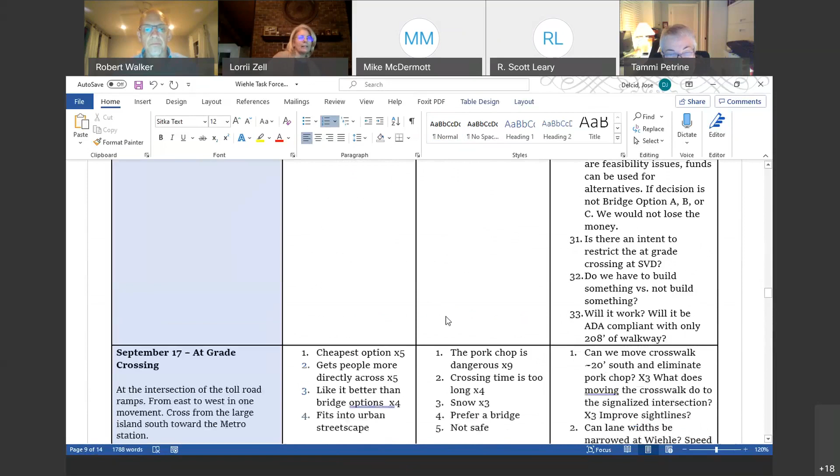I think that's all that I can think of. Jose is going to grab your questions. You can also put them in chat if that's easier. Then he can just grab them and cut and paste them into our continuing documentation of what we've been doing here. We've got documentation from every meeting that we've had. We have every question that you've asked, and we're going to try and answer them all so that by the end, hopefully after this next presentation, really we're going to do some solutioning and some soul searching.

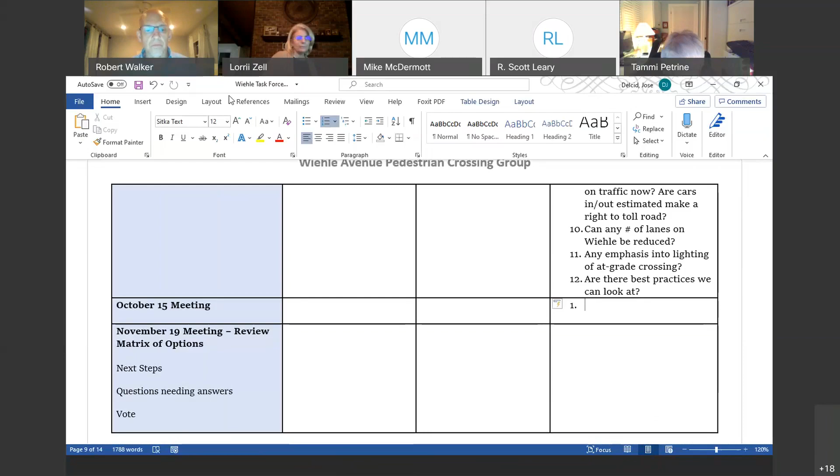And so actually the next meeting is going to be a little harder and more participatory than these have been, because you are going to be the one helping us, telling us why you feel a certain way. So we want to make sure we give you enough information tonight and answer a bunch of questions. So without further ado, I think we want to get started.

Okay, Bob, thank you, I have one more question for you. Sure, I have just one more question. Are you growing a beard?

This is my fall look. Your fall beard? Just checking. He's going rogue. It's almost no-shave November.

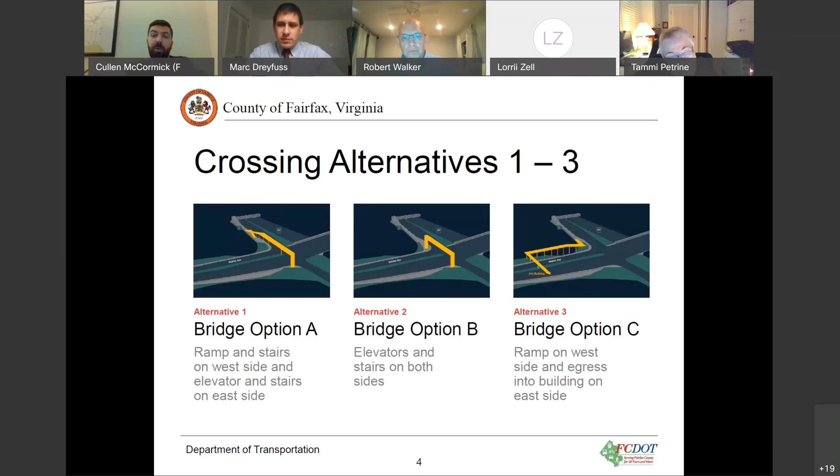As you may recall from last month, there are 3 bridges. One on the left has a long ramp on the west side of Wiehle Avenue, and then an elevator and stairs on the right side. Option B in the middle has elevators and stairs on both sides. Option C has a ramp on the west side and then connects into one of the buildings of the proposed campus commons site on the east side.

And then on the second page, we've got the tunnel alternative that will essentially punch through the 2 retaining walls just south of the toll road off ramps. And then 2 at-grade crossings: one at the intersection with high visibility crosswalks, and one at a mid-block with a HAWK signal.

We showed a picture of that last month. Essentially that's like a signal that only turns on when someone's trying to cross the street.

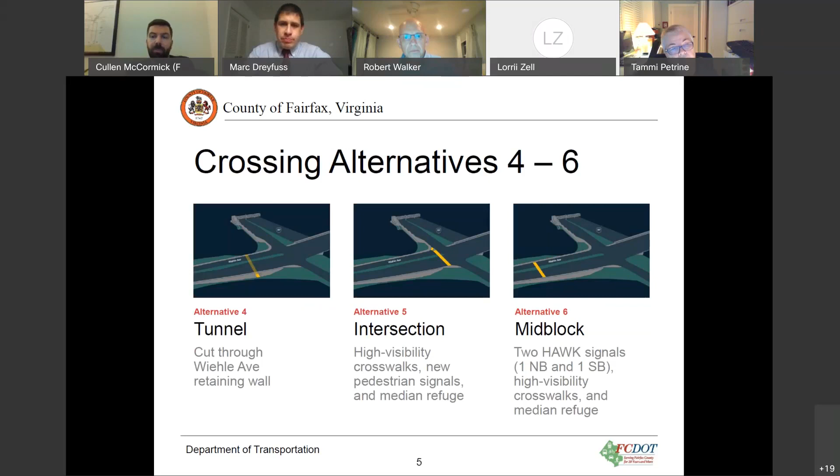So first up then is the walk shed comparison. Essentially this asks the question of how far can someone actually travel using sidewalks and walkways in the area. We picked 2 common units of time, 5 and 10 minutes, about the average length someone can walk in about a quarter mile or so. This is all assuming the shortest travel time, so not having to wait for things like signals and elevators, just how far could you possibly go in these times.

It's not sort of everywhere you can go. It's if you took a particular route, and then we did a software analysis that combines all those different routes together to create this area. We do this to see how much access the different crossing alternatives provide in the way of getting to key places around the Wiehle Avenue area.

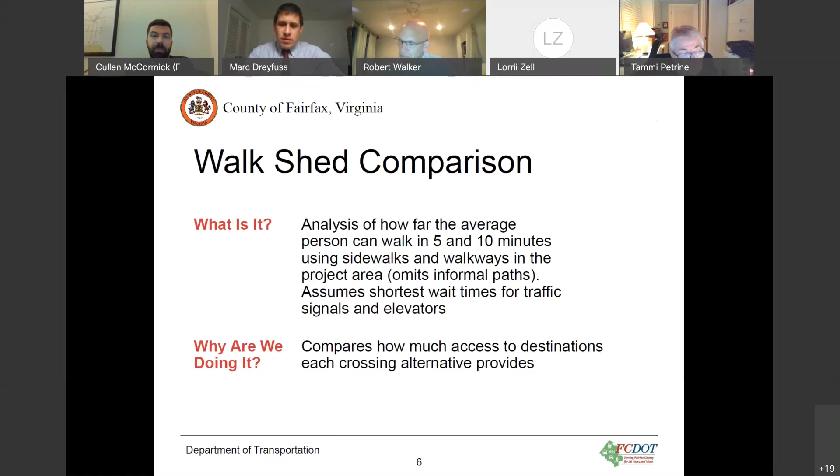So this is the overview of what you'll see on the following slides. There are red lines that originate from the center of the crossing that represent all the possible formal walking routes you could take. We're not really looking at cut-throughs or going through someone's backyard, just main routes here.

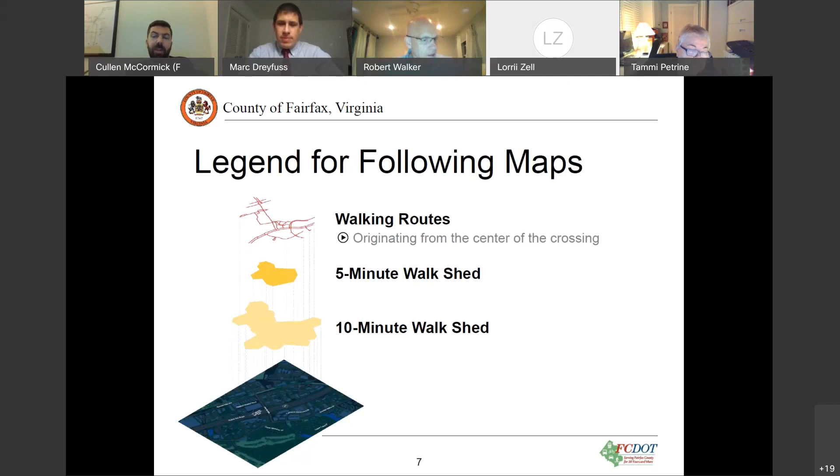Then in the darker shade of yellow, you'll see the 5-minute walk shed, which is everywhere one could possibly go in about 5 minutes. And then the lighter shade of yellow is the same thing, but at a 10-minute distance.

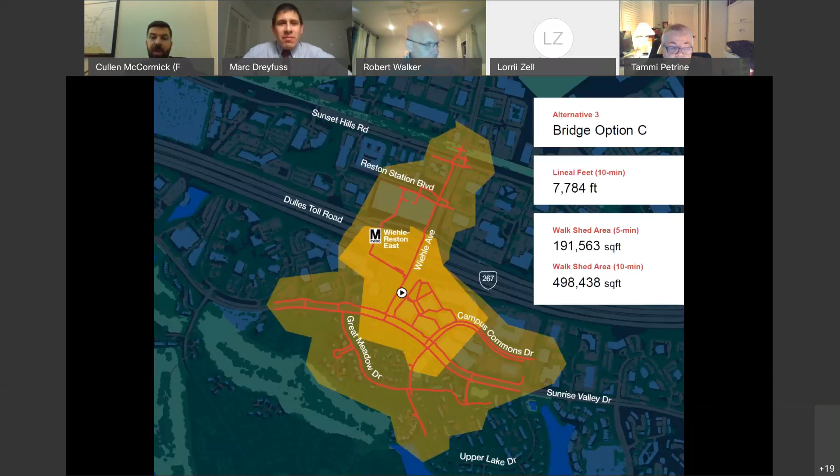Option C, which is further south and has some unique elements to it, has more coverage in the south of Sunrise Valley neighborhood area, but doesn't let you get quite as far to the north, given that it's generally positioned further south of the other 2 bridge crossings.

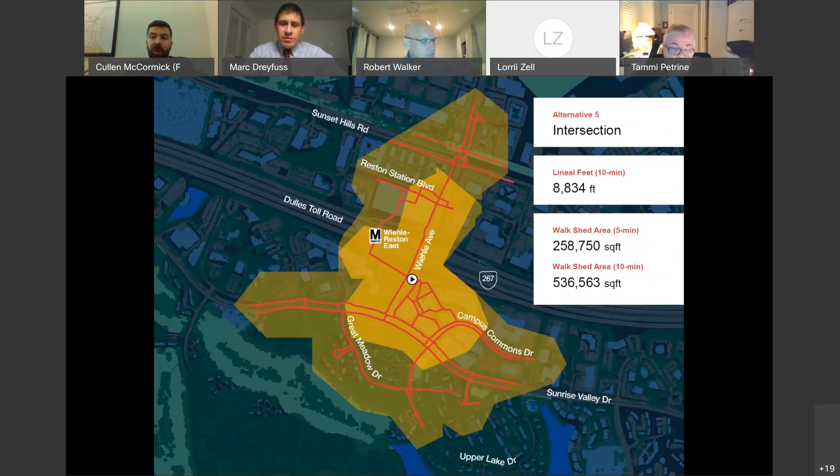So then we get to the tunnel, which has better coverage than the last bridge crossing, but as we'll see in a comparison a little bit later, is not the largest footprint. The largest ones actually go to the intersection at-grade crossings. This is generally due to basically not having to go out of your way to use these. There's no up and down, there's no tunnels, you just wait at the crosswalk and go. So the intersection crossing here is the largest footprint of all of the different crossing alternatives.

And then the mid-block one you see here last, because it's a little bit further south, it has a different profile here in terms of its coverage.

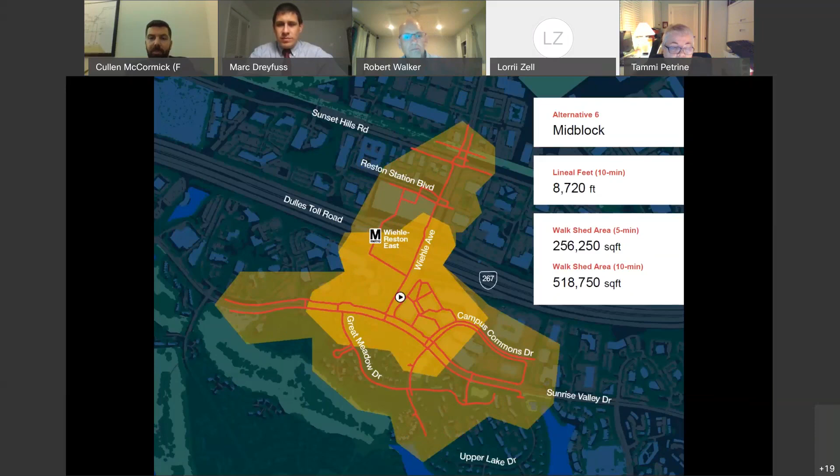These are all fun and good to look at, but it's probably easiest if we compare them all in a graph here. So what you'll see is the lineal feet, that's the distance you can cover—those are the red lines on the previous maps—the walk shed area of the 5 minutes, and then the walk shed area of the 10 minutes. If you can follow the contours of these graphs, you'll know that they generally go from largest to smallest.

There's this interesting wrinkle, though, which is the tunnel alternative. What we believe is happening here is that because it requires a lot of out-of-direction travel in the very immediate area of the tunnel, but if you're walking through the redeveloped Campus Commons site, you're kind of already at grade with the tunnel because it's already sunken down below the grade of Wiehle Avenue. You can actually go further to the south and east with that alternative. So it bumps up where you can go in a longer period of time, but you're constrained in the smaller amount of time simply because there's so much elevation change to get to distances in the immediate area.

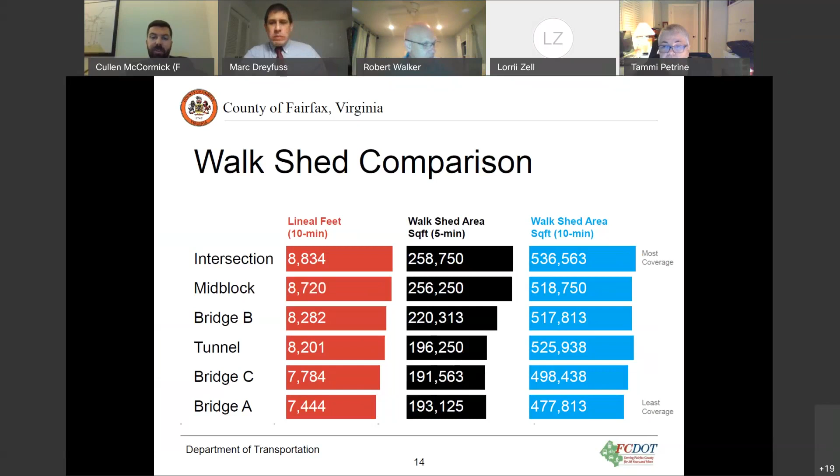So again, as you can see here, rolling this all up, the intersection crossing allows you to go the farthest in this amount of time. And then the Bridge A option has the shortest footprint or the shortest distance you can cover in the same amount of time. And so just some key takeaways from this analysis here.

Generally speaking, the crossings all provide similar coverage. You can get to major areas in the station area, commercial sites, office sites, large portions of the neighborhoods around Sunrise Valley. The at-grade crossings, as we mentioned earlier, tend to have the largest walkshed. Again, this is due to the lack of out-of-direction travel, no grade changes, and then, as we mentioned here, the intersection crossing has the overall best coverage.

Just kind of what is the scale of the magnitude of the difference between the best ranking crossing, the intersection, and then the one with the smallest footprint, Bridge A? It's about a 15% decrease in the lineal feet—again, the amount of path you can cover—and then a 25% decrease in the 5-minute walk shed between the two comparisons. So again, some differences here, but I think the key takeaway is they all provide generally similar coverage.

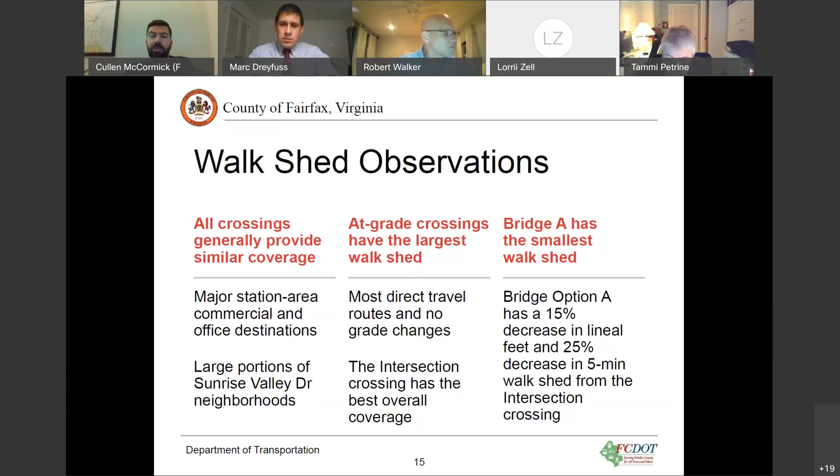So that kind of concludes the first portion of the analysis here. The second piece is related to the walk time comparison, which is kind of similar, but allows us to contrast the alternatives in a slightly different light.

Essentially what this does is we took 2 points in the area that represent a pretty typical trip that someone might make, beginning from the Wiehle-Reston East station south entrance. If you're familiar with the area, this would be basically at the escalators that lead you from the bus bays where the buses get off the freeway or the toll road and then head up into the station area. And from that point, the walking route here would continue south and to the east to the intersection of Sunrise Valley and Campus Commons Drive.

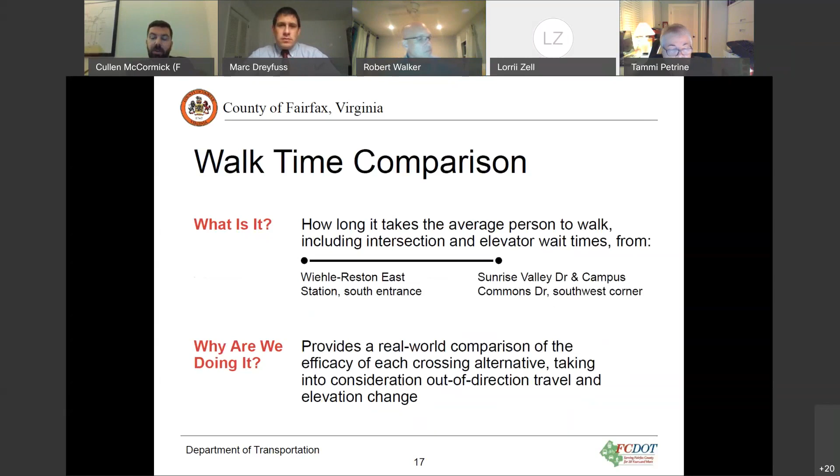Essentially what we did is we just calculated the walking time that a typical person would need to do this route following different alignments, different walking routes that take into accommodation the various different crossing alternatives. We're doing this again as a real world comparison of basically how efficient each of these crossing alternatives is for getting to and from common destinations in the area, taking into consideration things like out of direction travel or elevation change that are inherent to each of the crossing alternatives.

So this essentially will help you navigate the following graphics in the couple slides that are after this. You'll see these bar charts that show basically the range of walking time. The furthest you can get, assuming that you nail it and you get all of the lights green and you don't have to wait for elevators and things like that—that's that darker shade of color. The maximum walk time there is if you happen to get stuck at every intersection, just to give you the full gamut of possibilities here for your travel time.

And then what we've done with the colors is you'll see there are essentially 3 groupings of walking routes. There are those that follow the west sidewalk of Wiehle Avenue—you can think of that as the existing routes that are out there right now on the ground. Those that would follow a new sidewalk along the east side of Wiehle Avenue, in the black there. And then last, the routes that would follow a cut through of the campus commons site, taking advantage of some of the new walkways that the applicant will be building on that parcel.

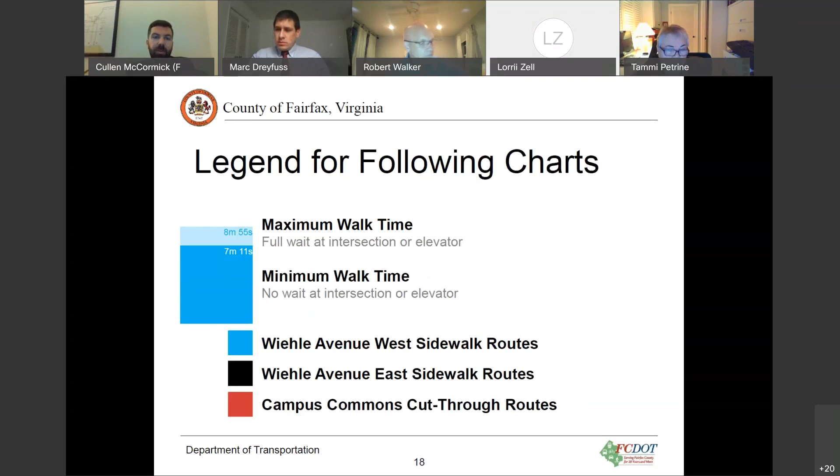So first up, we'll look at the Wiehle Avenue West sidewalk here. You can see the thumbnails of the routes at the bottom there. The one on the left basically takes you along the south side of Sunrise Valley Drive, up the west side of Wiehle Avenue, and then through the transit station plaza.

The next one assumes you take a more informal path through Commerce Metro Center. We looked at this because we saw a lot of evidence that people are already doing this path, and wanted to be able to include that in the comparison here. So generally you see walking times between about 6 minutes and close to 9 minutes.

When we look at routes on the east side of Wiehle Avenue, generally the travel times are a bit longer, and you can see why. If you look at some of the thumbnails at the bottom, you've got that corkscrew turn in bridge option C, where you actually have to go down a set of steps, enter one of the buildings on the development site, and go up an elevator to access the grade of the bridge. Some others, like the tunnel, involve going down a set of stairs, passing through the site, and then making more of a meandering route over the station.

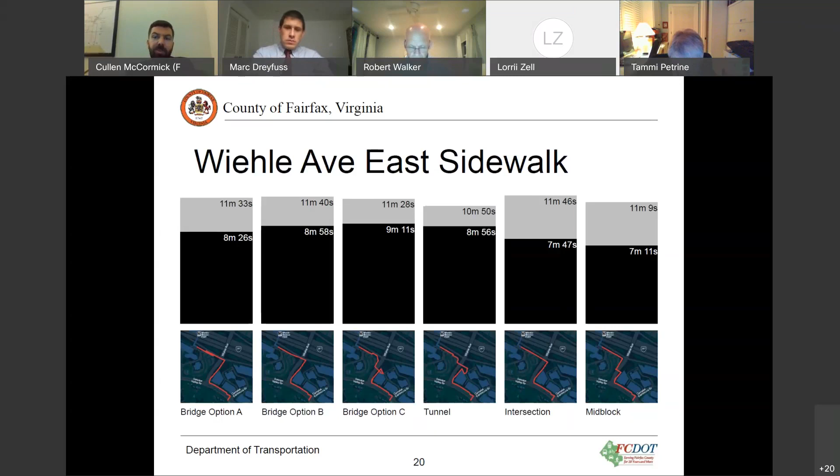Bridge option A, as you may recall from the thumbnail image earlier of the bridge profile, has a ramp on the west side that doubles back. So what you're finding here is that there's generally longer routes that require, in most cases, some form of elevation change. In some cases up to almost 12 minutes, which is a solid 3 minutes over the longest time you would have had on the Wiehle Avenue West sidewalk.

So then the last set of things we looked at was the Campus Commons cut through. Again, this is if you cross to the north side of Sunrise Valley from that intersection, pass through some of the paths on the site, and then continue along your journey across Wiehle Avenue.

And what you see here that's kind of interesting is there's some real winners and losers. Some of the routes can take advantage of the lack of grade change, like the tunnel, for example, which is below the grade of Wiehle Avenue and doesn't really require you to change grade. It's actually pretty efficient in terms of time.

But then you have some of these crossings that require you to go up to the grade of Wiehle Avenue from that lower area where the site is, like the mid-block crossing, or some of the bridges, which require you to not only go up from the lower level of the site to the grade of Wiehle Avenue, but then continue further up to go over the bridge. Those generally contribute to longer travel times.

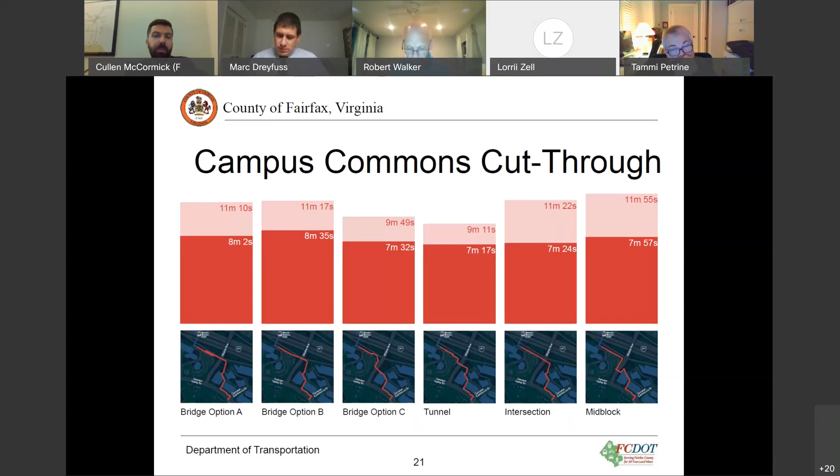So when we stack these all up again, like we did for the last set of data, you can see that really, if you're going to be making this journey, your fastest option is still probably going to be using the existing routes. Generally speaking, the cut-through routes do a little bit better in terms of saving you time than those routes that follow the east sidewalk.

However, the notable exception is the third shortest. Looking at the shortest travel times here, the third shortest is the Wiehle East sidewalk, which would give you a fairly comparable travel time to the west sidewalk, owing to how similar those routes are.

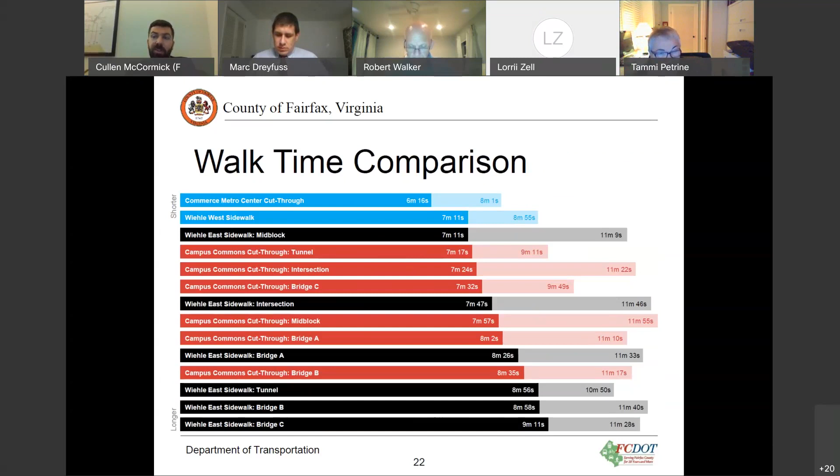So again, like we did with the last comparison, there's a couple of key takeaways. As I mentioned, existing routes along the west side of Wiehle Avenue appear to be still the fastest if you're doing this travel. The more traffic signals you have to go through, the more elevators you have to wait for, the more it increases your variability and creates less certainty in your trip.

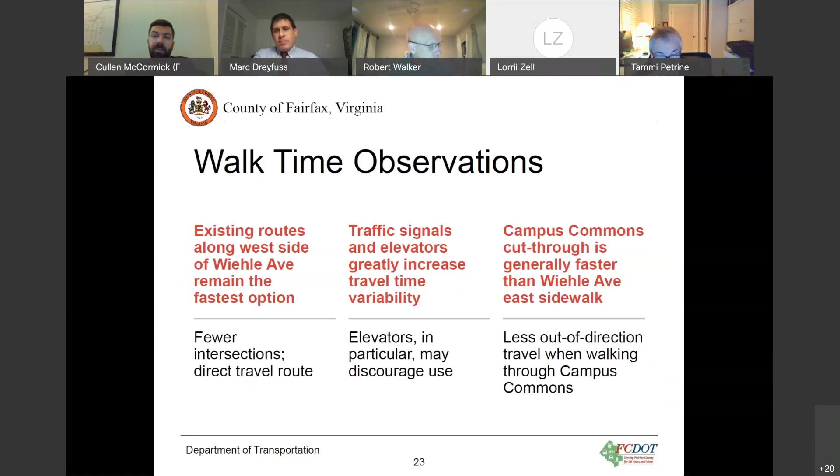And then last up, as we mentioned, the Campus Commons routes actually do provide a competitive advantage over the Wiehle Avenue East sidewalk, but again, that's still, in most cases, not enough to save you time over the existing routes.

So that gets us through the first comparison analysis here. At this point, I'll turn it over to Sagar at STV, who will walk us through some of the work they did to describe crossing refinements. And before he gets into it, he's going to describe some of the folks on his team who've been helping out with this work.

Thank you, Cullen. My name is Sagar Adivrekar, and I am a structural engineer with STV in our Virginia office. With me I also have our engineering director, Derek Overstreet. Before I go into detail about our crossing refinements and design feasibility, he will briefly speak about STV's experience with similar kind of work. Over to you, Derek.

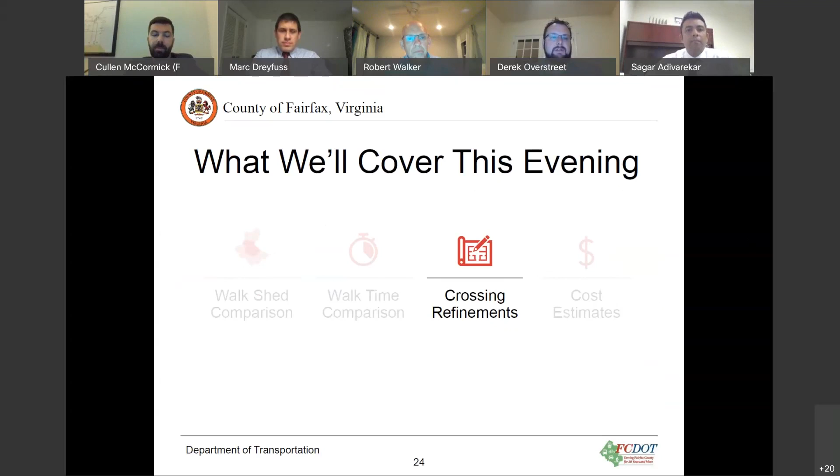Thank you, Sagar. I'm Derek Overstreet, and I manage our bridge and structures practice for STV in Virginia and Washington, D.C. As we looked at this project with Fehr and Peers, we applied a lot of our past experience in pedestrian bridge and pedestrian tunnel work. In the last 15 years with STV, I've been involved in a number of pedestrian bridge and tunnel projects. Right now we're involved in the design of six different pedestrian bridges for the Virginia Railway Express in Northern Virginia. I've also been involved in a VDOT project with a shared use path bridge over an interstate near Roanoke, Virginia, and other pedestrian bridges in North Carolina.

As far as tunnel experience, I've got both design and construction experience. On the construction side, I've been involved in a number of micro-tunnels and hand-mined tunnels. On the design side, I've designed a pedestrian tunnel in Spotsylvania County, and we're looking at a few concepts for VRE at some of their stations. I also designed a vehicular and pedestrian tunnel underpass in Hanover. So we've got a lot of experience, and we've applied lessons learned and past knowledge in looking at this crossing project, which we've been very excited about. I'll turn things back over to Sagar.

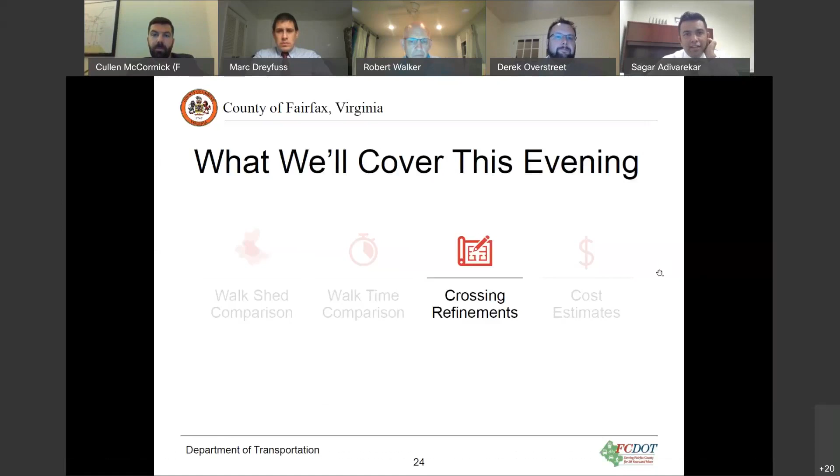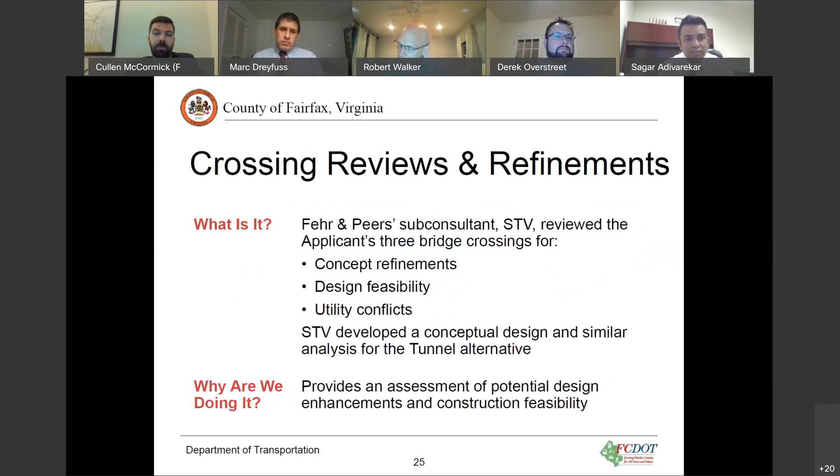Thank you, Derek. Can we go to slide 25? As Cullen mentioned, we at STV reviewed the applicant's three bridge crossing options, A, B, and C, for concept refinements, design feasibility, and also utility conflicts. STV also developed a tunnel option, and we looked at the same things for it: design feasibility and any utility conflicts. At the end, we also developed a rough order of magnitude cost for each of these alternatives.

Next slide. So these are the alternatives that we studied. The intersection and the midblock options don't have any structural elements to them, like a bridge or a tunnel, so we did not study those. But these are the three bridge alternatives from the applicant that we studied, and we also assessed a tunnel option.

As Cullen has talked about these thumbnails before, bridge option A has a ramp that is very close to the Metro station exit, and then an elevator on the east. Bridge option B has an elevator on both sides. Bridge option C has a ramp on the west that goes along Wiehle Avenue, crosses the bridge, and is connected to one of the buildings on the east side.

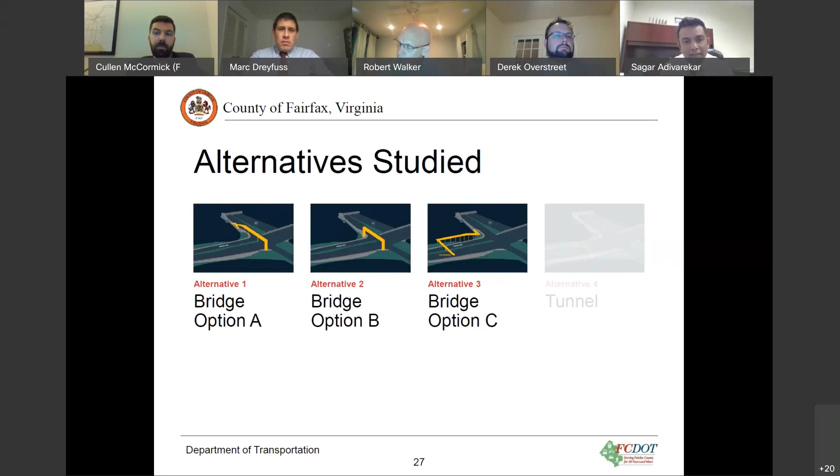In terms of concept refinements, we looked at the applicant's bridge, which provided a minimum vertical clearance of 17 feet. We recommend providing 17 feet 6 inches of vertical clearance. Normally for highway bridges, vertical clearance is 16 feet 6 inches, and the AASHTO LRFD guide specification for pedestrian bridges requires 1 foot higher than highway bridges. So we recommend 17 feet 6 inches as vertical clearance.

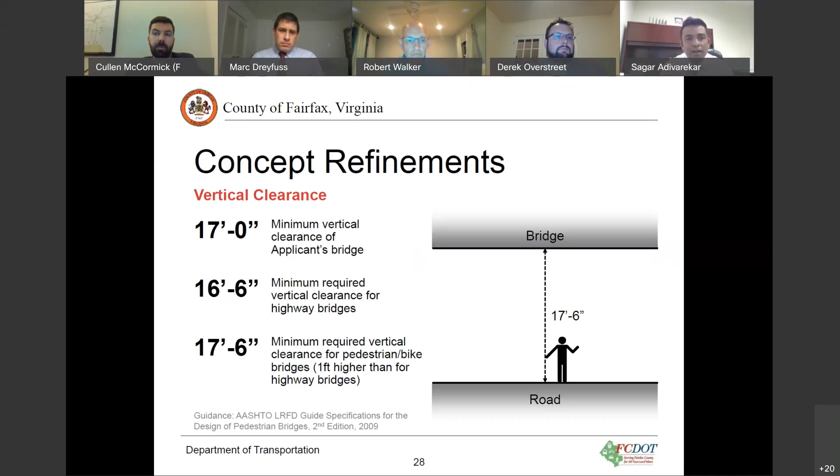Next slide, please. The applicant's bridge had a face-to-face width of 6 feet. To accommodate bicycles and pedestrians on that bridge, we recommend a 14-foot wide bridge with a clear width: 10 feet for the pathway, and 2-foot buffers on each side.

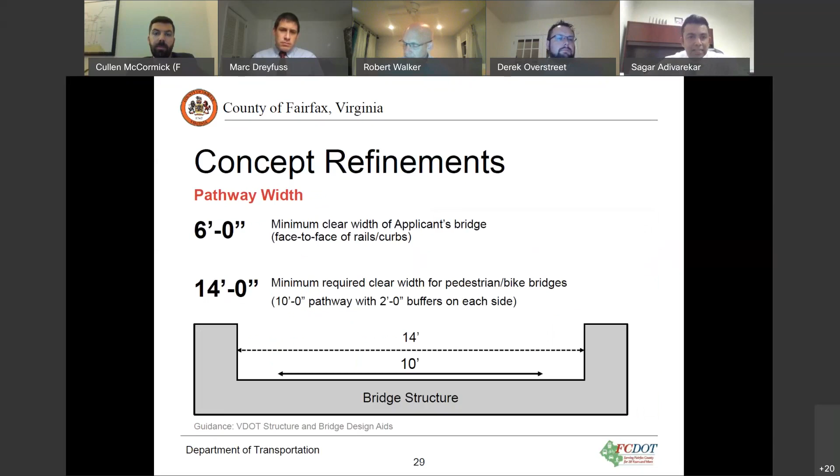We also recommend some pedestrian lighting for nighttime use. The applicant's concept did not include any details on the lighting, so that is one thing which would add to a bridge.

When we looked at these three bridge options, A, B, C, there are bridge piers right in the median, as well as piers for the ramps that get on the bridge. There were no pier protection systems in place on the plans. If there is a bridge pier, you need to ensure it is protected from any vehicular collision. That system is essentially a ground-mounted crash-worthy barrier with a guardrail attached, and the guardrail also has an impact attenuator attached. So we recommend having some form of this kind of pier protection system to protect the bridge piers.

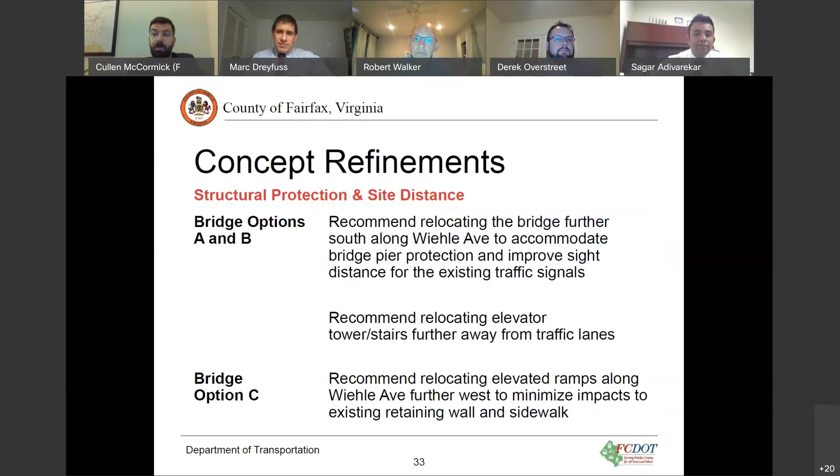That was the concept refinements for the three bridge options. Now I'll talk a bit more about the design feasibility of these options. First, these bridges need to comply with the requirements of the AASHTO LRFD guide specification for design of pedestrian bridges, as well as some parts of the AASHTO LRFD bridge design specification.

For the bridge's inspection frequency, it really depends on the type of structure. I've noted that a fracture critical bridge, for example a truss or a steel two-girder system with a fracture critical member, would need to be inspected twice as often as structures without them. So we would consider precluding use of these kinds of fracture critical members. I bring this up because the applicant's bridge is 6 feet wide, so it would potentially have two girders, and we'd want to avoid that based on past experience. I was working on a bridge at the Appalachian Trail in Roanoke, and VDOT had specifically told us to preclude use of a two-girder system bridge there.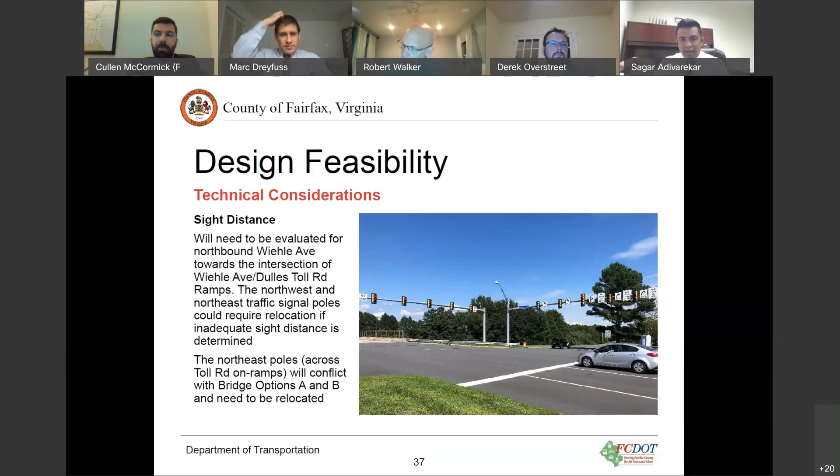Along with that, there's the northeast pole that has a long arm extending across the toll road access road. That would be in conflict whenever there's going to be either the bridge in option A and B, or the elevator tower as well. So they would need to be relocated.

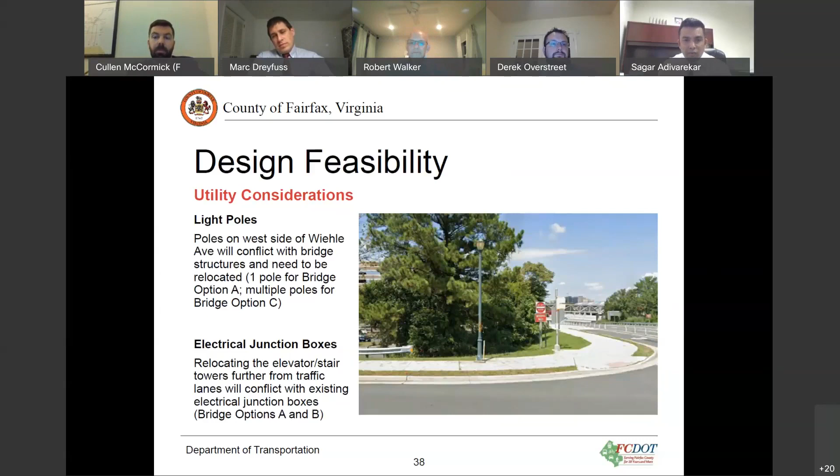The other utility considerations we looked at for these three bridge options: as you can see in the picture, there's one of the light poles, but there are several other light poles as you go south on Wiehle Avenue, to the west, that would need to be relocated during construction of the bridge and the bridge ramps. Along with that, there would be some electrical junction boxes on the east of Wiehle Avenue, right at that intersection. So as soon as we try to relocate these elevators or stair towers further away from the traffic, those might conflict with the junction boxes for option A and B.

Next slide. So that was what we developed for the crossing refinements, as well as the design feasibility and utility considerations for the three applicants' bridge options.

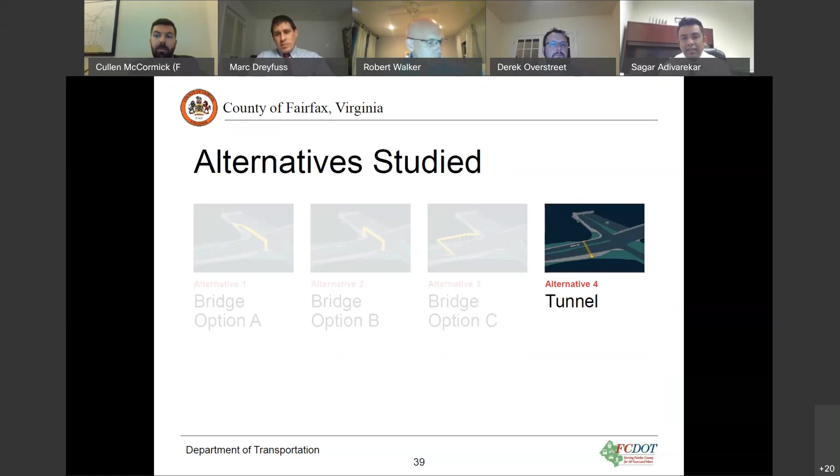And this is the tunnel option that STV developed, under Wiehle Avenue, going east to west. This is a sketch; at the top you can see a longitudinal section. It's essentially going east and west under Wiehle Avenue for a length of 155 feet. This was the shortest length across Wiehle Avenue.

As you can see, this is going to be a 14-foot clear width, similar to the width of the pedestrian bridge that we mentioned or recommended in the refinements. It will have an 8-foot minimum vertical distance inside the tunnel. And as you can see in this picture, it's going through two retaining walls: on the east, an MSE wall, and on the west, a cantilever concrete retaining wall.

We might come back to this slide as we talk about the other, but let's move ahead to slide 40, please.

These were some precedent examples. We wanted to show you these from Georgia and Pennsylvania, similar kinds of structures constructed under a live railroad track. We have a live road, so something similar. These are also subgrade; it would probably need a ramp or a stair going up. It would look something like this, as fancy as you can make it, with a brick facade, or you could just have a regular concrete finishing inside. But these are just examples to give an idea of how the tunnel would look.

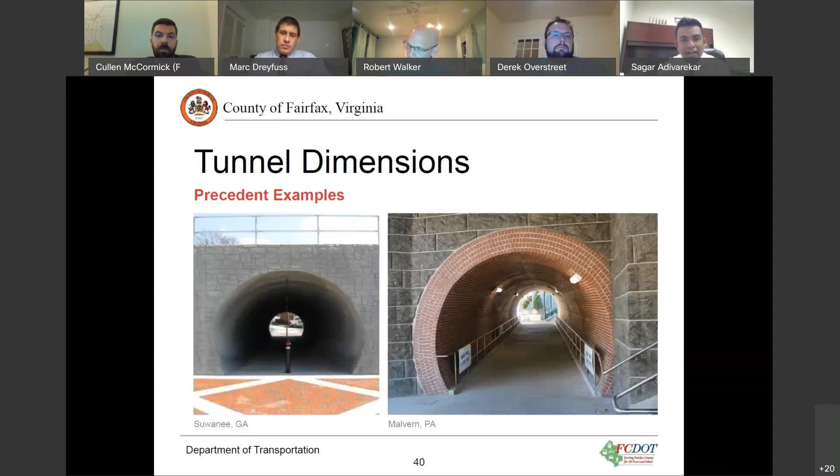We can go on to slide 44. So with the tunnel options, there are also utility conflicts. We definitely identified two 15-inch reinforced concrete pipes under Wiehle Avenue that would have to be relocated when the tunnel is put in. There's a drainage inlet and associated pipes right in the median where the tunnel would pass, so those either need to be abandoned or relocated.

And there are several light poles on the retaining wall on the east, which would be in conflict during placement of the tunnel. So essentially, they can be taken out during construction and put back on top of the retaining wall once it is put back after the east portal is completed.

Next slide. And this is where we were done with our assessments, and now we get into the cost estimate. These are really high-level, rough order of magnitude costs that we developed for these options for design, construction, and also construction inspection. It compares the amount of investment required for each.

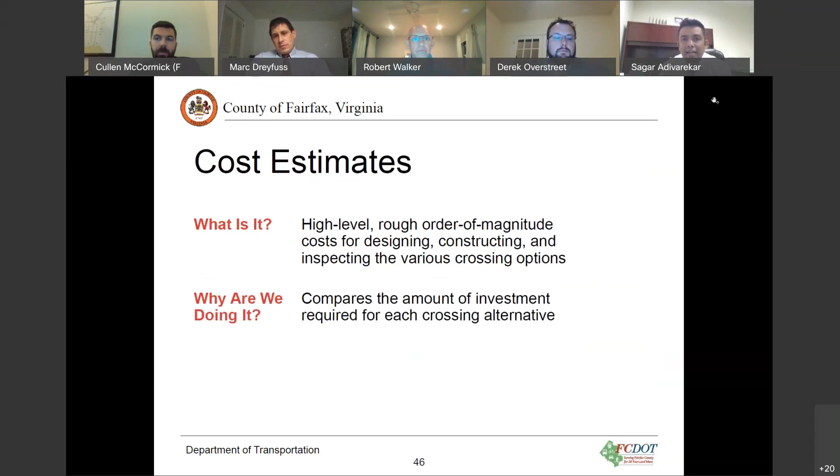I'm going to let Cullen take over for the next slide. Great, thank you, Sagar. Basically Fehr & Peers and STV split up the cost estimates. We do a lot of work related to traffic engineering, so we handled the cost estimates for the at-grade crossings, which I'll talk through here in just a second, and then Sagar will explain the cost estimates that were developed for the various bridge crossings and for the tunnel as well.

In the mid-block, the lion's share of that construction cost comes from getting a new traffic signal.

Those tend to be fairly pricey, adding it to that mid-block section. Because this crossing would require additional modification to the median, adding in new pavement markings, new curb ramps, it's got a higher planning and design cost versus an intersection which is by and large already using existing infrastructure. I'll pass it back to Sagar to talk through the cost estimates for the bridges and tunnels.

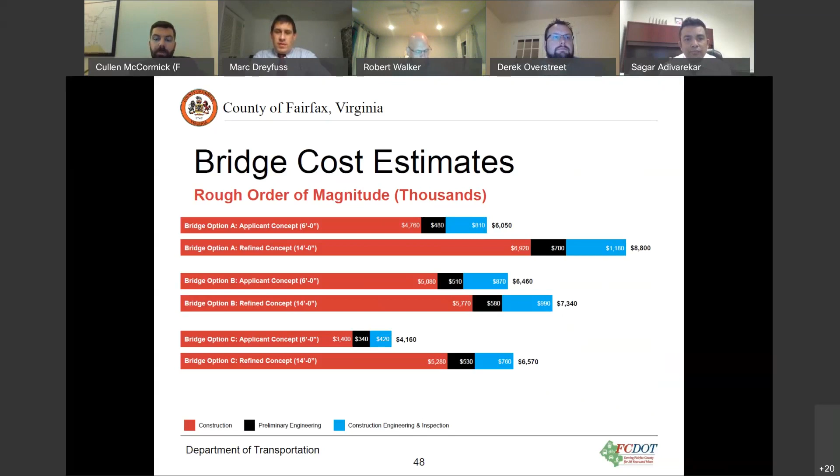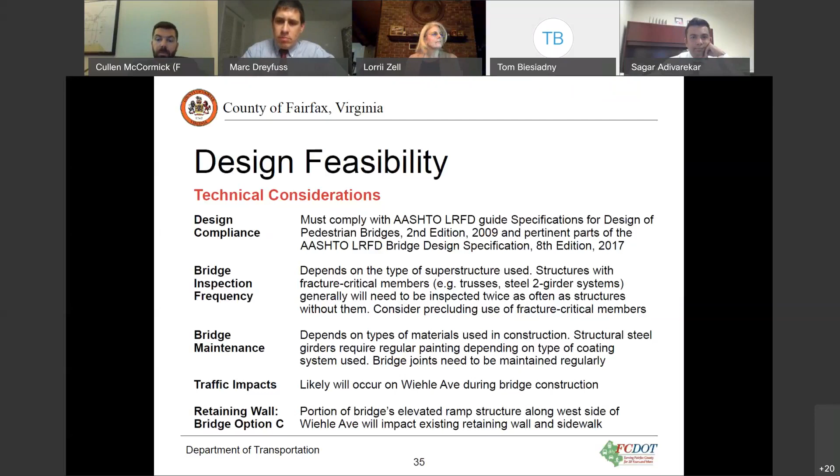Okay, thank you, Tom. I have one last question on page 36. This was interesting, Sagar, I didn't quite understand this. Does this mean these bridges cannot even be built because you cannot put the crash protection in, as they're modeled too close — there's not enough room to put these crash protections in? Or are crash protections optional?

I think Sagar can take that one as well. So the crash protection — you would have to design it for a crash collision. Feel free to chime in, Derek, if you have something to add. They can be designed for collision, however, in most of these cases, the sizes of the piers and everything would start getting bigger, the reinforcements start getting — it's like a spiraling effect the design would have as soon as you start bulking it up to take the impact. Most of the time what I've seen is providing a pier protection barrier in front of these piers, like at least on the highway, or where there's traffic with high speed. Derek, do you have something to add to that?

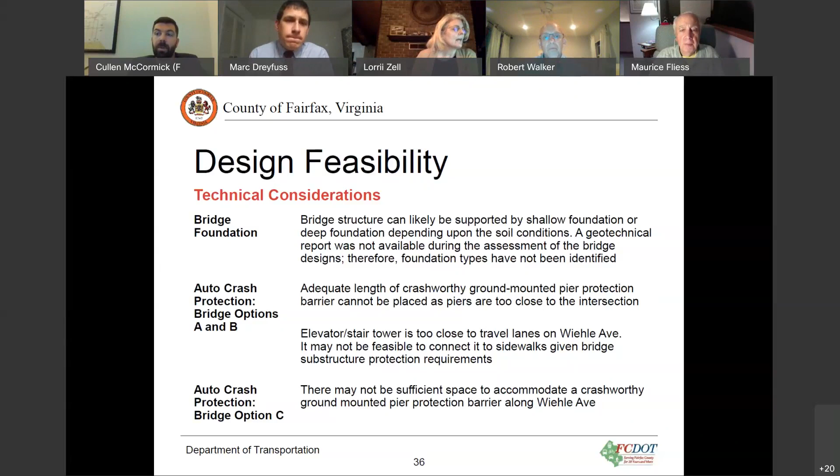All right, so I'll start with the first part of your question, and then I'll turn it over to STV, who might be able to speak in general terms to the second part. Before you start, can the slide on cost be brought up, page 50, please? And then Marc, go ahead. Okay, wait till we get that up.

So to answer the first part, yes, a cut and cover option, which for those who don't know would mean essentially digging out a hole and then covering it up—based on this situation and the importance of Wiehle Avenue, both for access to the Dulles Toll Road and access over it, we considered it and felt the impacts to traffic would be too great. It wouldn't just impact traffic on Wiehle Avenue, it would impact traffic patterns on the Dulles Toll Road and how people could get to and from their homes. We would have to close either all of Wiehle Avenue or half of it at a time for an extended period, and given the critical importance of that corridor, that didn't seem feasible.

The other piece of that equation, though, was something you mentioned in your first question—based on the grade differential, because we wouldn't have to dig down as far to bore, that actually had a positive impact on the overall cost. But I'll turn it over to STV to speak a little more to the relative costs between cut and cover and the option they estimated here.

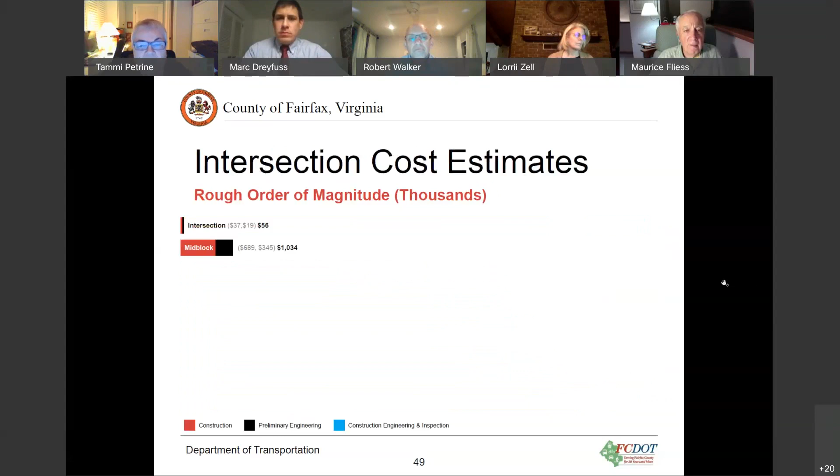One last technical question on the underpass. It was mentioned that on the west side, the elevation is not the same as grade. Is it lower or higher? Does it need a ramp up or a ramp down? And could the tunnel itself be sloped to accommodate for that grade change?

Thank you. Hi, Tammi, this is Marc. I'll actually say on the first point about the destinations, you can hang that one on me. The reason we used the Metro to the Sunrise Valley Campus Commons intersection wasn't so much to say that everybody's going between those two places. It was mostly to pick two destinations that weren't immediately at the intersection.

Obviously, there could be additional analysis, but effectively we're looking at where the bulk of the pedestrian traffic would come from, and based on Theron Pierce's analysis of the times, if you were on the bridge on the Wiehle Avenue Bridge, it's going to be faster to walk down Sunrise Valley Drive than to cut through the neighborhood. So if you're on the west side, coming from the new building at Reston Station at the corner of Wiehle Avenue and walking south, you're better off staying on the west side of the street.

That said, we also looked at the likely destination of a lot of people that might be using a crossing in this location, and between the Campus Commons development, the other office park to the east of Campus Commons, along Campus Commons Drive, it seemed there would be a lot of demand, not all, but a lot of the demand would be going from the area between Sunrise Valley Drive and the toll road across Wiehle Avenue to the metro station area. So we thought that was a good example.

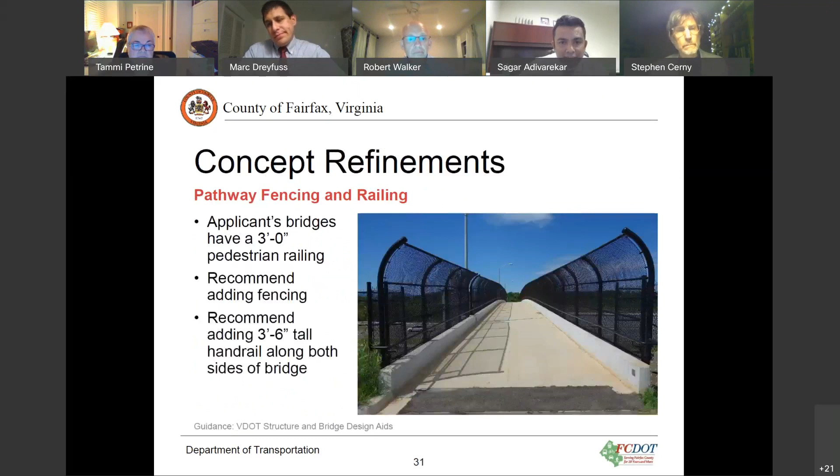Sagar or Derek, can you speak? So you are talking about relocating the bridge further south on Wiehle Avenue and how far it should be from the intersection. So the picture I had up for the pier protection, I don't remember the slide number, but as you can see, from the edge of the pier protection it goes a certain length, and that depends on the speed and all that. It's either 30 feet or 35 feet on each side of that pier face, and then of course there is a guardrail connection to it too. So I think it would have to shift at least that many feet at a minimum to be able to place that pier protection, and then also an impact attenuator in front of it to make sure it's adequately protected.

Okay, thanks. And then my second question is, so the tunnel estimate does not include utility relocation? Correct. Do you have any sense of how much that could add to the cost? Would it be in the millions, I would assume? I don't exactly have a number, how much in a ballpark it would cost. With the limited information we had, we really don't know how deep those utilities are. I also don't know how long they run along Wiehle Avenue, and at what could be a good point to actually relocate them, and if they have to go through a different alignment, where it would be. So I do not have a ballpark or any number for that utility relocation. Okay, thank you. Thanks. Thanks, Stephen.

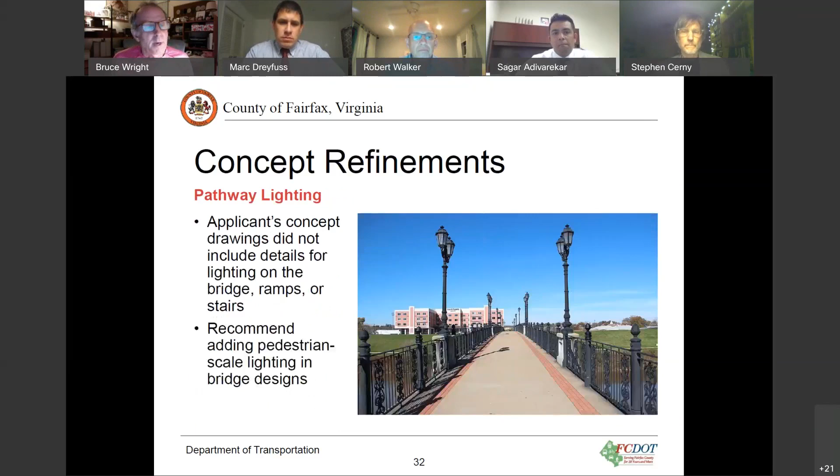Steve got to one of the questions I had about utility relocation, and I'd think that would be pretty costly. It seems hard to move forward with the decision without at least a ballpark estimate. I also have a comment about slide 34, where there's a recommendation for a metal bollard on the bridge. As a cyclist, those can be very dangerous, and we've advocated not to have those on bridges. I know the Park Authority will sometimes put them up despite our protests, but that's not something we'd like to see. I don't think there'll be a huge problem with motorists using these bridges, but anyway, that's a minor point.

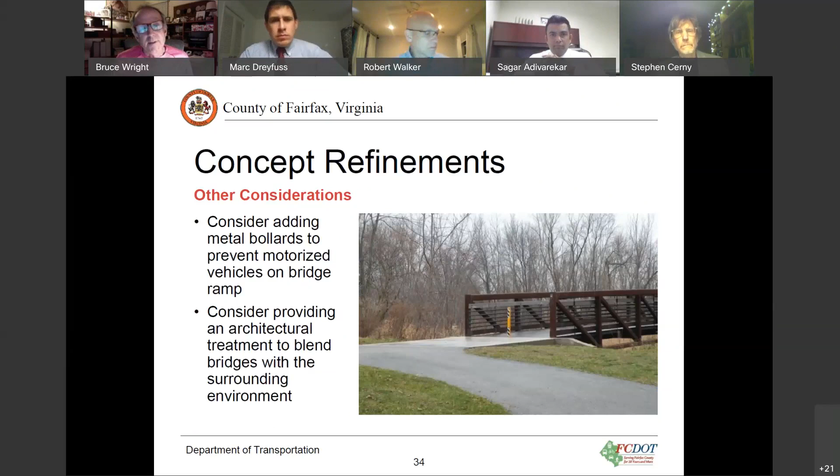Back to the cost - is it correct to assume the county will be responsible for the costs above? No? Okay. If the applicant builds the bridge, the applicant pays the full cost, is that correct? That would be correct - if the applicant builds a bridge as per the proffers, they would be responsible for all costs involved. All right, what about if there's a tunnel?

Is the applicant obligated to build that, or do they only contribute $1.5 million, as Tammi had said? If the study group selects any option that they recommend to the board, and the board moves forward with any option that is not bridge option A, bridge option B, or bridge option C, the applicant will provide a contribution of $1.65 million, and the county can do whatever it feels is appropriate with that to improve a crossing at this location.

Okay, and this is actually a good opportunity to remind everybody that the way the proffers are worded is that the applicant will provide one of the three bridge options, or $1.65 million for the county to improve the crossing - which could be a different overpass, underpass, improvements to at-grade, whatever makes the most sense. I also want to note, in regard to the utility question, a utility survey would be needed to reach that level of information.

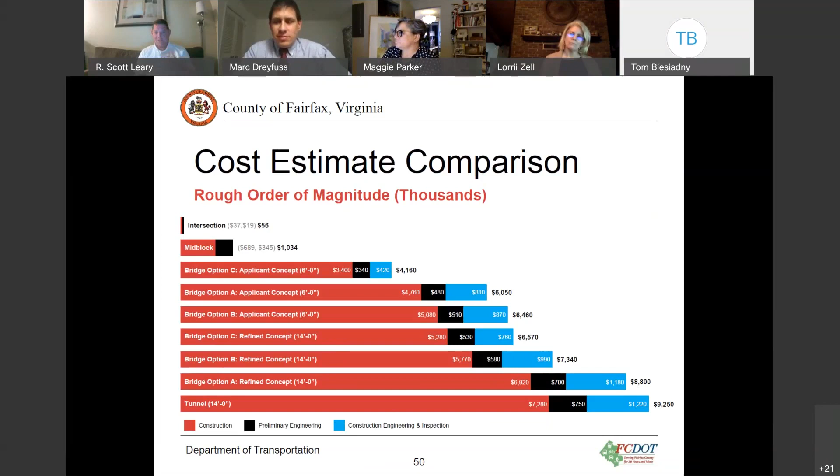So, given the other 4 options, 3 bridges or overpasses, 1 underpass, this, by virtue of its mandatory location by grade and the rise on Wiehle Avenue, becomes the most logical piece to fit with the overall master plan. And if that's the direction we're headed, that we're trying to build something that actually serves the public and fits the master plan, not just dedicated to the future residents and employees at Campus Commons, that becomes the best piece, well-designed, well-placed, as a future larger piece of the pedestrian and bicycle infrastructure network.

The cost increases to me. I mean, I'm just looking at the numbers now. An additional $5 million is, quite frankly, zippo in the long-term scheme for something that people would actually use. If you were to build an overpass and try to connect it to that master plan trail, that's never going to work. People aren't going to use it. So it's not so much that I changed, I got a little bit of clarity, and therefore I can fall in completely behind. I still think that at-grade crossing that is going to exist needs to be very well designed.

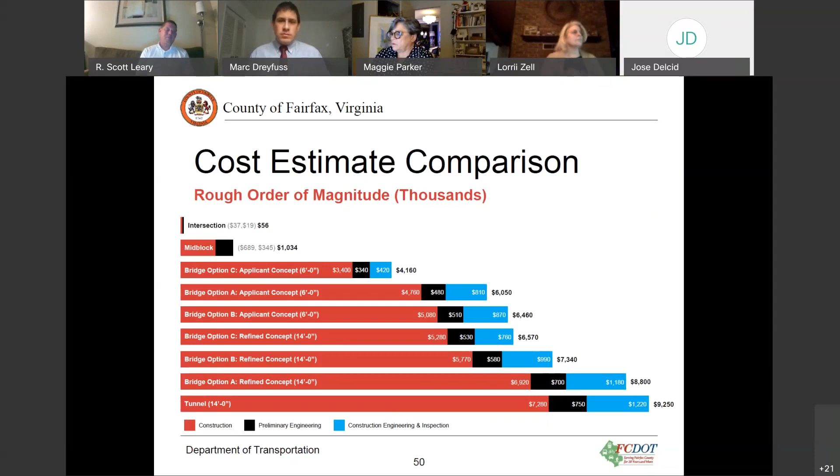Hey, Lori, Rob, I think Connie has a hand up. Oh, okay, I'm sorry. Yeah, go ahead, Connie. All right, hi, it took me a while to find how to put my hand up.

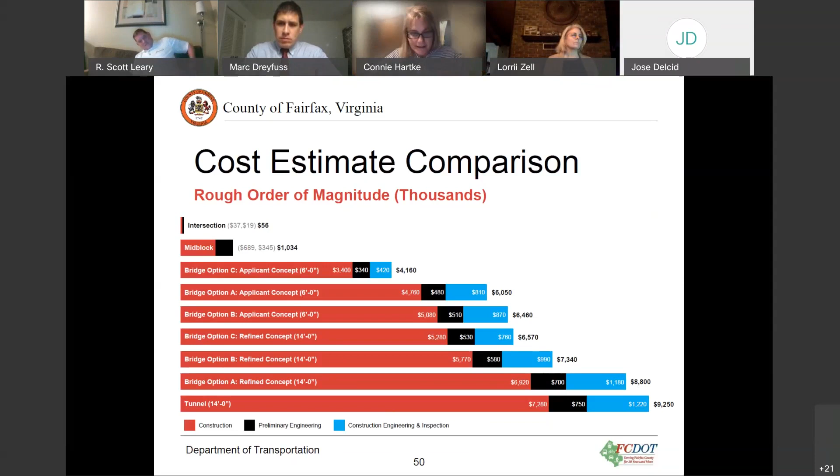Just two quick things. If we could go to slide 32, and I appreciate listening to Scott on that. Perhaps the bridge options are going to be out, but I just wanted to have us all know the answer here. It's about the guardrails.

And so I guess this may be a question for Sagar. If a bridge was going to be built and it had to have this pier in the middle, how long would those guardrails be, and are they essentially going to prevent anyone from crossing in the middle, which people are going to want to do? Maybe it's a safety thing to not allow it, but on the other hand, people will be frustrated jumping over them. So I don't have to have an answer, but just think about those guardrails. I'm just wondering the length.

Connie? Yes, I may, we have evaluated at Comstock, we've evaluated a big bridge potential from Isaac Newton Square across Wiehle to come onto the western side of Wiehle.

The railings, the side protection is an absolute must, and it does change the way that you design and implement, and it goes all the way down to the street level. And just to be clear, I'm not talking about the things that keep people from throwing stuff off the bridge. I'm talking about the guardrails on the ground at street level.

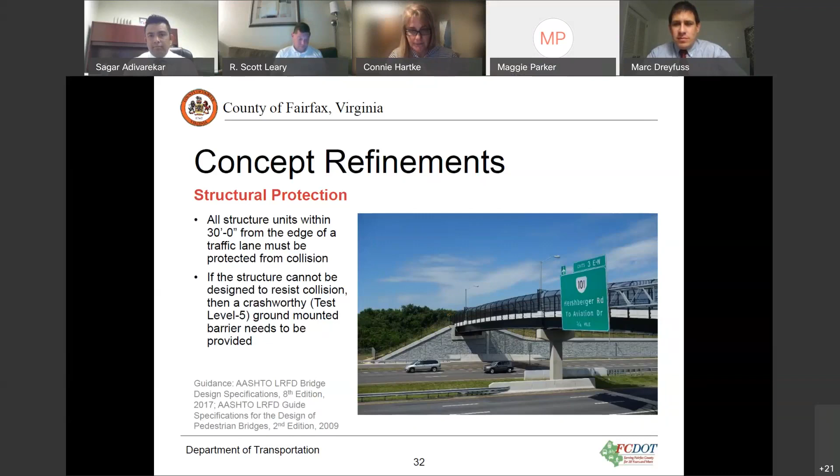Okay, one last thing real quickly, I know we're running out of time. It's on slide 44. Just any of the county people here on the call, is there anyone I could follow up with to ask questions about this drainage inlet that you all know about? Just tell me who I can email later to ask about drainage. Connie, you're welcome to email me. I'll get you my information here, and I can work on getting you any answers to any questions you might have. Thank you, Marc, that's all.

You know, Jen had a question. Not really a question, but she was wondering if it sounds like when you have a bridge, it precludes having an at-grade crossing because of the bridge in that location. So no sight distance concern? But the sight distance has to do with the bridge getting in the way of cars seeing the stoplights, right? Mm-hmm.

So that's correct. The other piece of this, though, it's not just about the site crossing Wiehle Avenue. There are still pedestrians that need to cross the toll road ramps, so we need to make sure there's sight distance for those people as well. So we would have to look at how and if an at-grade crossing and an overpass could be accommodated, with consideration of the piers and everything else. But that would all have to be studied further. That goes back to something STV said, which is that they'd really recommend the bridge be relocated further south in order to accommodate a lot of these things.

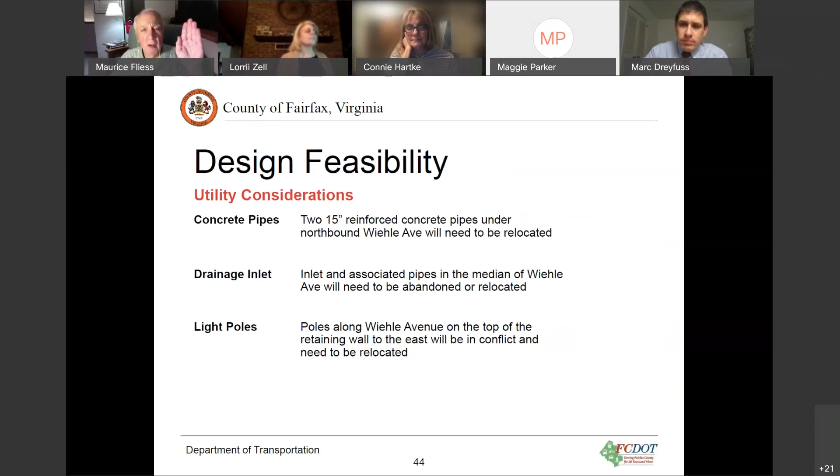So we have six minutes. Lori, I have a comment. Yes, sir. Maurice, can you put up slide 40, please? We're going to have another meeting on this, Maurice. Okay, well, this will be very quick.

If I'm looking at this the way I believe it's designed, the question was asked: what about the ramp? Was that going to interfere with the sidewalk on the west side of Wiehle Avenue? If you look at the grade, the vertical structure going up is a retaining wall, and the sidewalk is shown to the right of the retaining wall. So the sidewalk would not be affected by the ramp. The ramp is coming farther west and then coming up. The existing sidewalk on Wiehle Avenue is not affected, if I'm looking at this the way I think it was intended. Is that right, Marc? That's correct. This is just a concept though, so we would look at this further, but as shown, that's correct. Thank you. You're welcome.

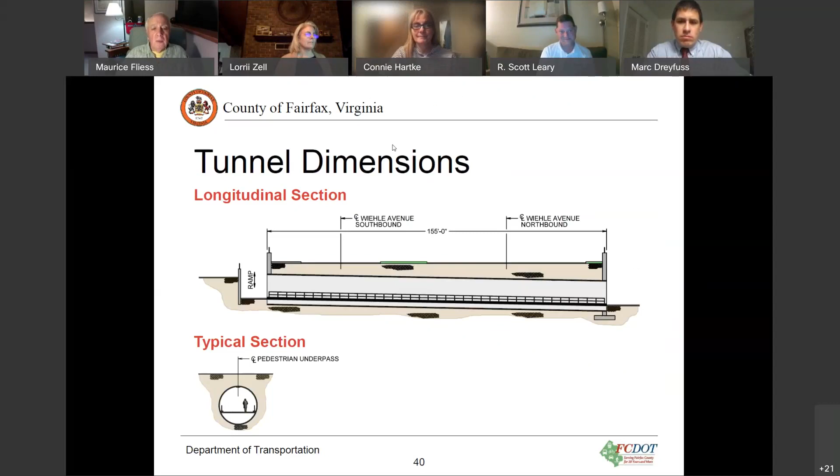We have a meeting on the 19th of November, and I'm hoping to set you all up before that meeting and try to flush out where we're going to end up on this and get a real feeling of what your choice is in terms of preference and why. There's a lot of reading, so if you didn't get the first presentation, reach out to Jose so he can get that to you as well. Next week, after I get it through Rob and Jose and they okay it, I'm going to send you a little bit of homework so you can gather your thoughts and organize them to share with us at the next meeting. Hopefully we can come to a consensus on whether we move forward, what we move forward with, what we think we should recommend and why, and really put some meat on it. But you guys have been phenomenal, and it's been very impressive to work with such a great team.

Hey Lori, before we go, I just want to touch on something really quickly. I know we've had some questions about this, so I'll be quick. Scott reminded me that this process, what we're calling phase 1, is a study of the crossing at this location. In the future, and this is not currently funded, though we hope to have it funded soon, we would need to look at how traffic is impacted once Metro phase 2 opens. We want to study the entire corridor from Sunrise Valley to the W&OD Trail. At that time, we could look at some of the questions people have had regarding the design and walkability of the corridor. I know that's something you're all interested in. Obviously, if we're looking at a larger corridor, there are people who might not be involved in this group who would want to be involved in that one. But I just wanted to remind everybody of that, as well as what Supervisor Alcorn said at the first meeting of this group: that all opinions are important, and we can pass something along to the board without total agreement. So if there are different perspectives, those will all be shared as we move this forward to the Board of Supervisors.